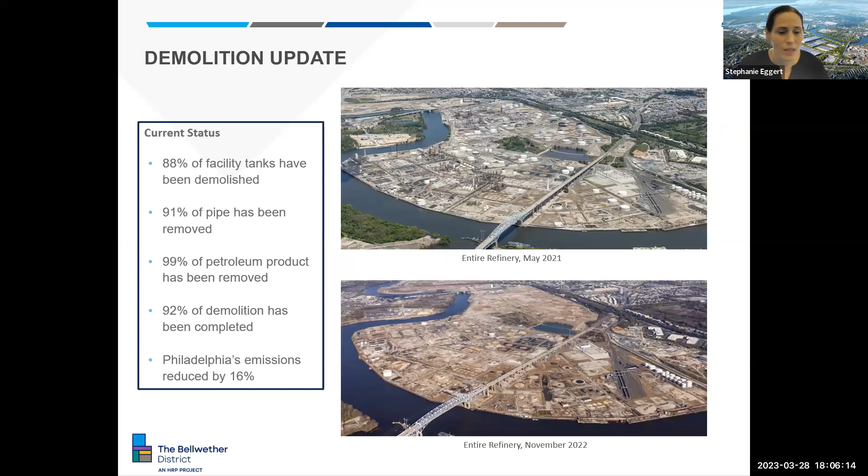And with that, you can go to the next slide and we'll turn it over to Julianna Connolly. Thanks, Steph. Hi, everyone. You can go to the next slide.

So we're busy over here on remediation activities. We like to start with this slide because there are two responsible parties at this property for cleanup work. And it's important to understand those distinctions as I talk through the work that we, PESRM or HRP, are working on. So the two responsible parties for the remediation cleanup work are ourselves, so PESRM or Hilco Redevelopment Partner. So we took over PESRM's obligations. And then the other responsible party is Evergreen or Sunoco, a party that ran the refinery prior to PESRM's operation of the refinery.

So what we, HRP, are focused on are cleanup of releases, so releases of chemicals to the soil and the groundwater that occurred after September 2012, and all of the Act 2 reporting associated with that contamination, Act 2 being the Pennsylvania site cleanup regulatory program. We're also responsible for sampling beneath all of the storage tanks that used to be present on site to evaluate whether releases occurred beneath those tanks.

We're responsible for management of soil during redevelopment of the property, and we're responsible for vapor intrusion assessments into new buildings. Vapor intrusion means making sure that volatile or vapor phase chemicals in the ground don't make it into the indoor air of new buildings constructed on site. Evergreen and Sunoco, who operated the refinery prior to PES, are responsible for contamination that was in place during their operation—contamination that occurred prior to September 2012.

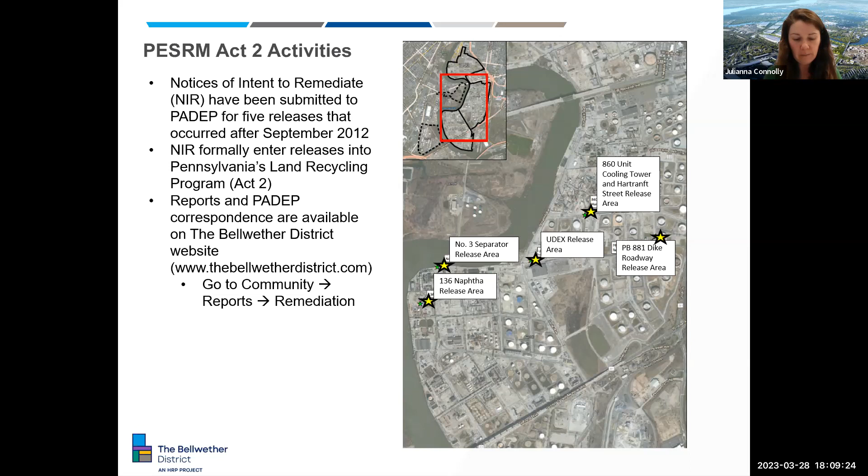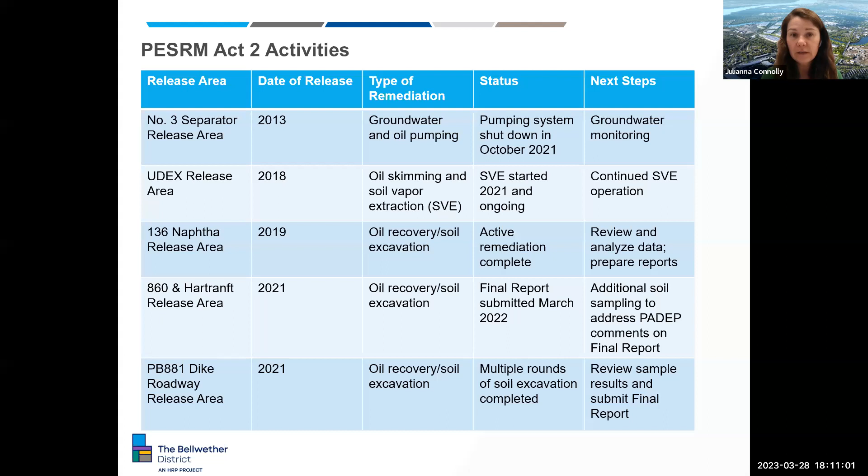The first 2 you'll see are some sort of pumping or recovery of oil from the subsurface. Those are the larger two of these 5 releases. And the UDEX release area is really the largest of the releases we're focused on. That's a remedy I'm going to talk about a little bit more on the next page.

Next slide, please. As I mentioned, this UDEX area is the largest of these 5 releases we're working on cleaning up. It covers about an 8-acre area on the site. The whole property is over 1,000 acres, and this area covers about 8 acres.

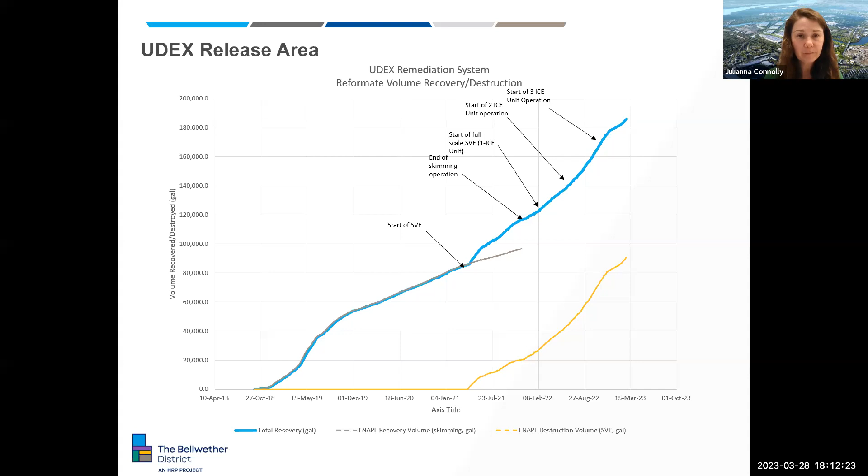As I mentioned, another thing we're very focused on is the AST, or above ground storage tank closure. For anyone familiar with the site, you would have been able to see from the street these huge tanks—they're called above ground storage tanks because they're above ground, as opposed to underground storage tanks that would be more typical at a gas station. They held oil or processed oil and different types of oil used or processed in the refining process.

As part of the regulatory closure of these tanks, we need to sample the soil and groundwater underneath to see if there were releases from those tanks that occurred that maybe no one was aware of, because the tank covered such a big footprint you couldn't really analyze underneath it.

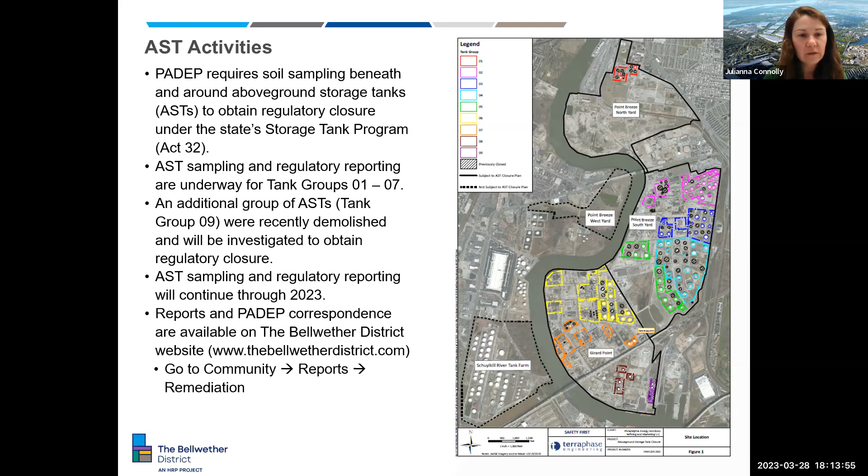The third area of focus for our remediation team is what we refer to as the soil management plan. The redevelopment of this property is going to require a lot of movement of soil around the property to achieve the grades necessary for construction. By grades I mean the ground surface level—some areas need to come up higher, and in other areas it'll be brought down lower.

At a site like this, with the history of being used for oil refining for so long, there's the potential for the soil to be contaminated. Prior to our acquiring the property, we came to an agreement with the Pennsylvania Department of Environmental Protection in a document called the Soil Management Plan, where we agreed to sample all of the soil we were going to move prior to moving it.

The reason we wanted to do that is for a couple of reasons. One, to make sure we knew what was in the soil before we moved it, so we could handle it appropriately during its movement. Two, to make sure that if soil is moved, it ends up in a new location that's safe for the new use—making sure the more highly contaminated soils aren't put where people would be more likely to come into contact with them.

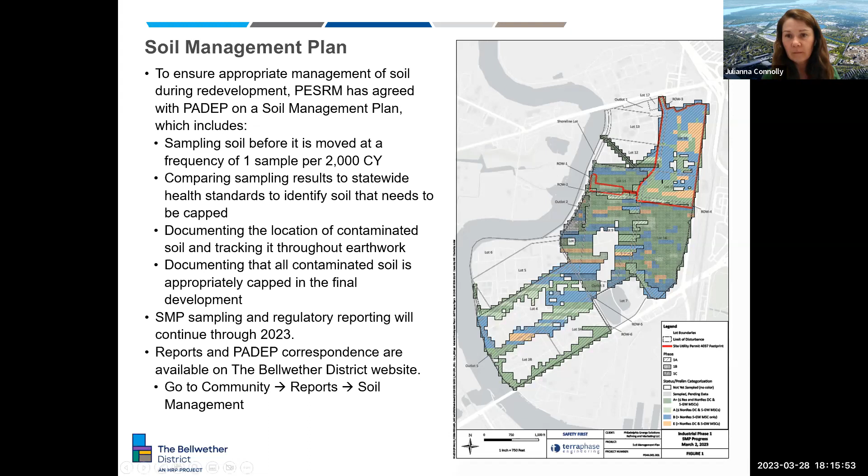Great, and I'm going to hand it over to George to talk through the framework plan.

Thanks, Julianna. Good evening, everyone. I'm going to quickly spend a few minutes walking you through an overview of the conceptual master plan framework that we've developed for the site.

As you can imagine, one of the challenges associated with developing a site of this scale is that it's very difficult, if not impossible, to plan exactly how the site is going to look once it's fully built out. Naturally over time, markets change and evolve, which will require us to respond accordingly. So when we consider planning for a site of this scale, we typically develop what we consider a master plan framework that lays out a street network, identifies key connection points into the existing road network and surrounding neighborhoods, while enabling some flexibility going forward.

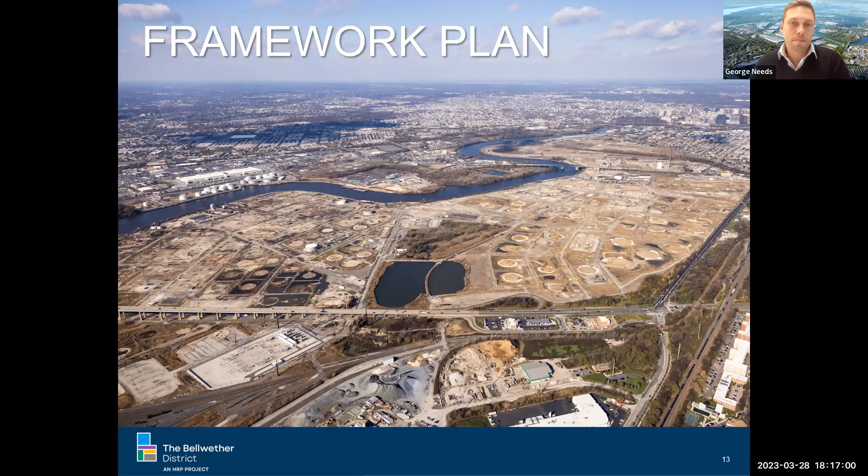This slide identifies the site within the greater context of the city. You're probably familiar with this, but the site area totals about 1,300 acres. While it is a large land area, given its prior use, it remains cut off from the rest of the city. It's bounded by a natural barrier in the form of the Schuylkill River to the west, and the I-76 highway to the east. One of the topics I'm going to get into is how we intend to create access to the site and develop those important connections back into the urban fabric.

In total, we plan to deliver around 13 to 15 million square feet over the course of a multi-phased, multi-year project, which is projected to generate up to 19,000 jobs. Those jobs will range across a range of salaries and qualification needs as we focus on two key industries.

The first being a state-of-the-art industrial and logistics area that you can see highlighted in yellow, located on the south side of the site. And the second being a life science campus shown in red, that will sit on the north side of the site.

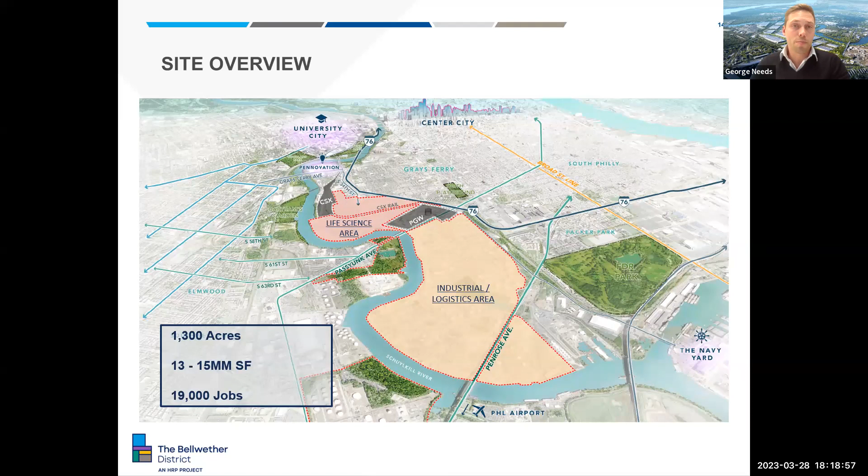That will house important research and development and manufacturing activities associated with the life sciences industry. It's important to note that, from an environmental standpoint, the redevelopment of this site is going to have huge benefits to the local communities that go beyond job creation, as the decommissioning and removal of the refinery has reduced emissions within the city of Philadelphia by a huge 16%, which is substantial.

This next slide illustrates some more details associated with each of these areas. The industrial and logistics area totals approximately 10.5 million square feet, planned to be redeveloped over approximately 750 acres on the southern side of the site—everything south of Passyunk Avenue. Here we're planning for important industrial and logistics users that will support the inner workings of the city and will deliver approximately 10,500 jobs.

On the north side of the site, everything north of Passyunk Avenue, we're planning for a life sciences campus totaling approximately 3 to 4 million square feet across two distinct parcels, delineated by an active CSX railroad. Based on this, we're projecting approximately 8,500 direct jobs at full build out, covering the full spectrum of qualifications from lab technicians to facility managers, biochemists, and marketing and administrative professionals. These jobs really require a range of qualifications from high school diplomas to a PhD.

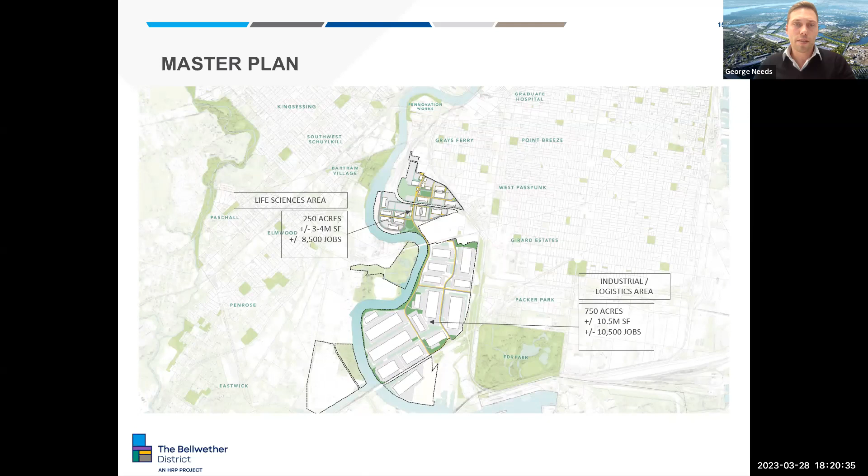In developing the framework, we really drew from a number of planning studies that had been completed to help inform important pedestrian, bicycle and open space connections that could be created. We looked to existing frameworks developed under the Lower South and Southwest plans, as well as the Lower Schuylkill master plan.

From that, we identified 3 key project goals as we developed this framework. The first being to reintegrate the site. Given its prior use, being the home of the largest oil refinery on the East Coast for the last century, the city has effectively been built and grown around it. So the first challenge is how we integrate it back into the city fabric, and in particular how we create new access points that will enable new connections into the public street, bicycle, and pedestrian networks.

The second point of focus is creating green pathways, and this considers how we can create a public realm and a street network that is safe, multimodal, and uses landscaping to connect open spaces while providing an enjoyable pedestrian experience, as well as thinking about other benefits like helping to manage stormwater runoff.

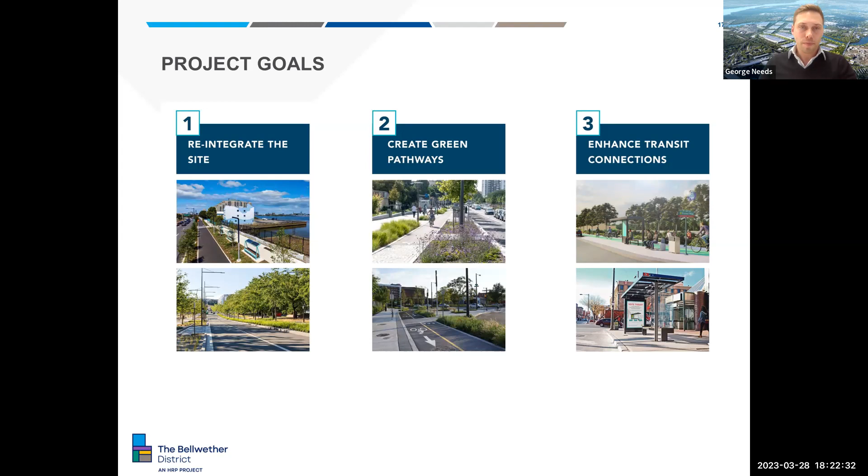This next slide identifies new public streets that have been proposed on the site, focusing on eight key access points where the site ties into the existing street network. On the logistics campus, south of Passyunk Avenue, the plan has 2 key north-south connections: Schuylkill Avenue and Francis Harper Drive, which connect Passyunk Avenue to Penrose Avenue, with an east-west connection in the form of Hartranft Street connecting out to 26th Street.

On the Life Sciences campus to the north, we have 3 primary access points that extend 34th Street into the site and provide additional connections out to Maiden Lane and Vare Avenue through Thornton Way and Jackson Street.

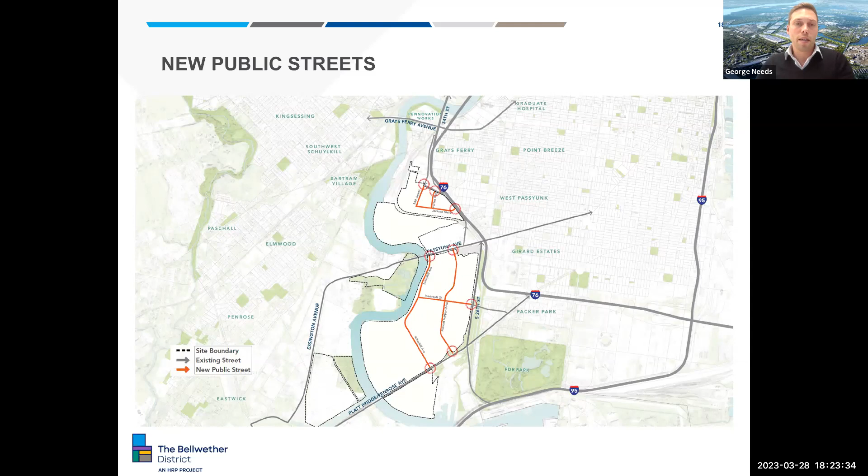This next slide looks at how we're proposing to tie into the existing bicycle network through a series of dedicated and shared bike lanes that will help facilitate a north-south bike connection, linking to existing bike paths at Grays Ferry Avenue to the north, and all the way down to Penrose Avenue to the south, enabling a safe and enjoyable cyclist experience through the site.

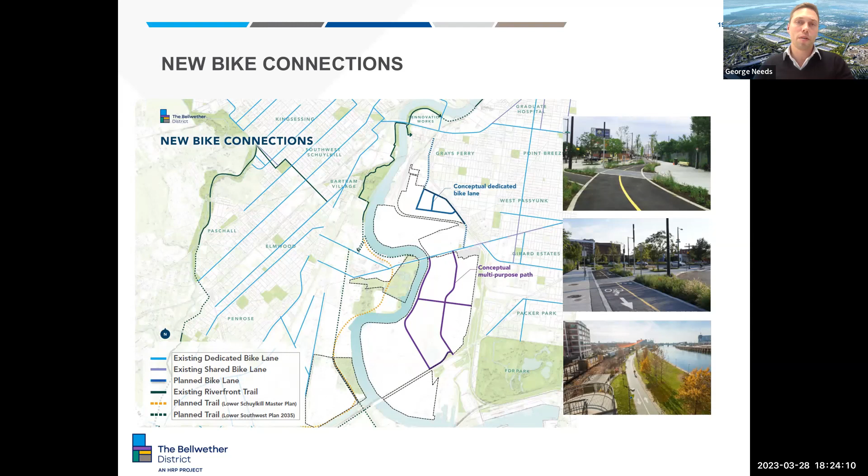This next slide illustrates the idea of creating a single green connection, a green spine that runs all the way through the site. Where possible, this could take advantage of riverfront access by adding thousands of plantings and trees, so that once complete, we'll provide a sustainable landscaped pedestrian and bike trail that facilitates an important north-south green connection from Pennovation to the north, down to FDR Park to the south.

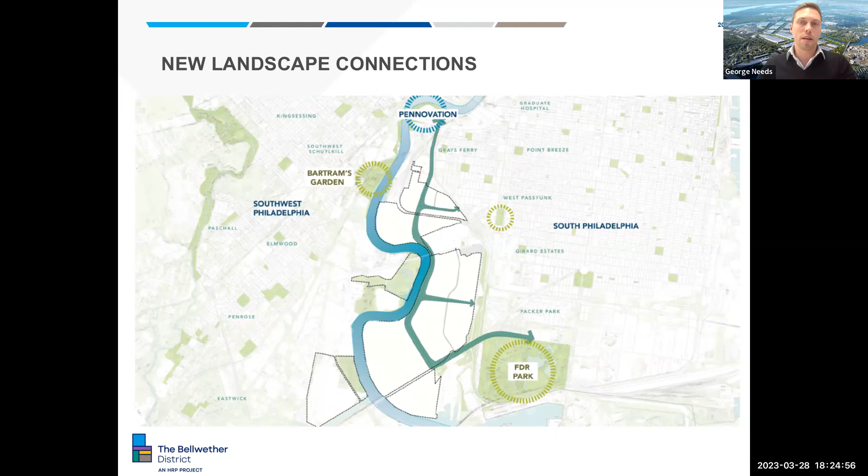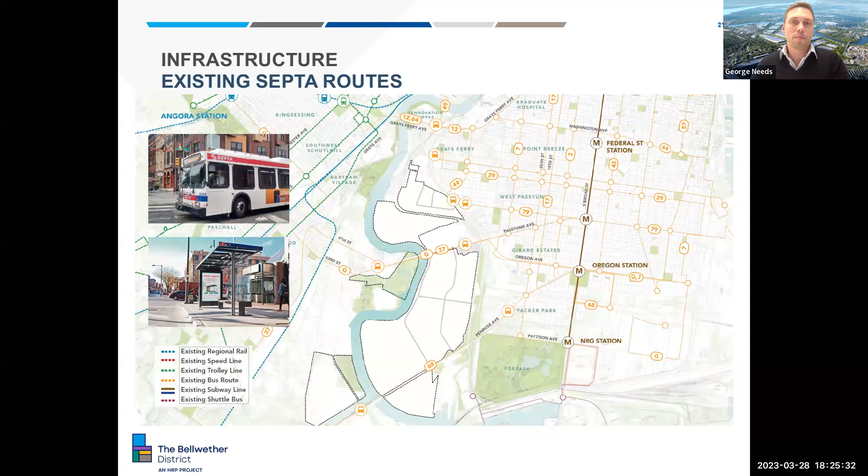Next slide please. And just quickly before handing it over to Amanda, I wanted to share some additional details associated with the phase one schedule for both the industrial and life sciences areas.

We've recently commenced enabling work to begin earthwork on the industrial side of the site for phase one, with vertical construction anticipated to commence in Q3 of this year.

Phase one of the life sciences is trailing by roughly 9 months. We have the goal of starting earthwork in Q4 of this year, which would put us in a position to commence vertical construction in Q2 of next year.

As we've been doing throughout this process, we're going to continue our community engagement efforts, and we'll be hosting quarterly meetings to share important project updates and details.

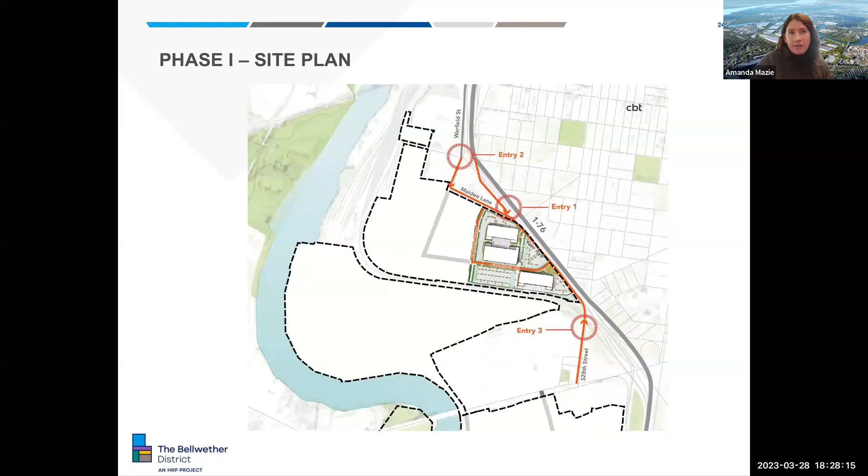Zooming in further, we are planning approximately 500,000 square feet in 3 buildings with surface parking. These buildings are designed to attract GMP, or good manufacturing practice, users, which will accommodate the manufacturing and storage of pharmaceutical and therapeutics or other processes that need to be conducted within a controlled environment.

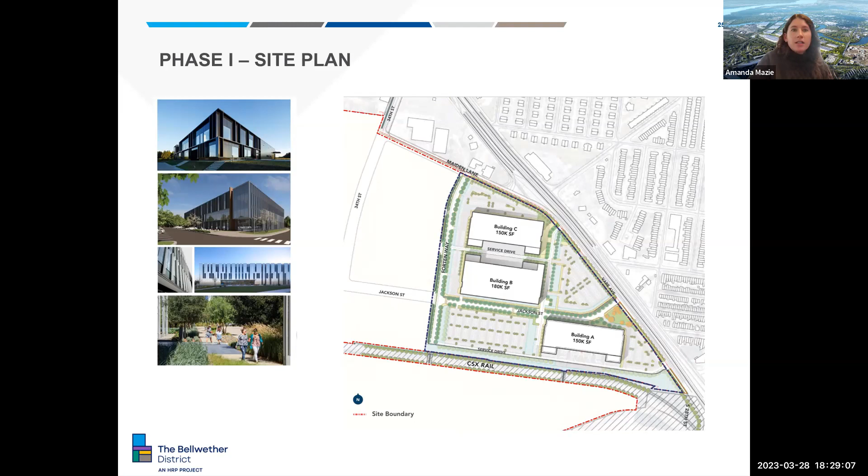The main roads in our first phase are Fortin Way and Jackson Street, with loading and service drives hidden from the main streets behind the buildings, but still very accessible. We are planning dedicated bike lanes and separate sidewalks with landscape buffers in between, and we will have on-street parking and lots of street trees.

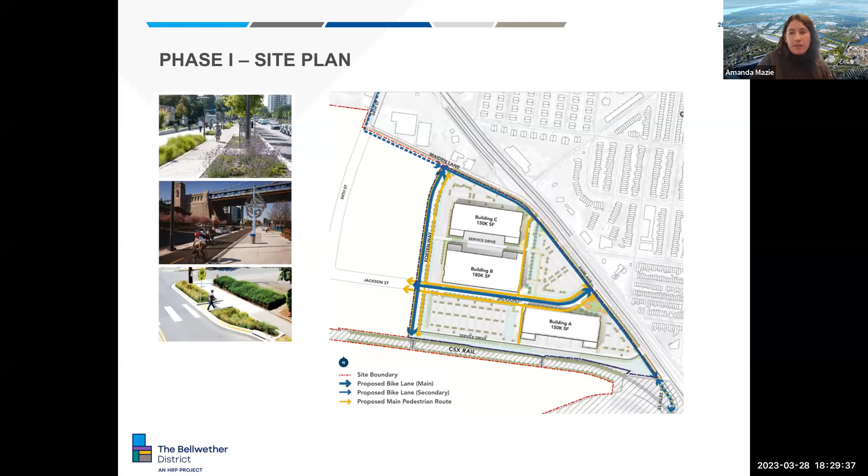This slide also shows a few images of Columbus Boulevard, which serves as the inspiration for our campus's design and feel. Next slide, and then I'll be handing it over to Justin.

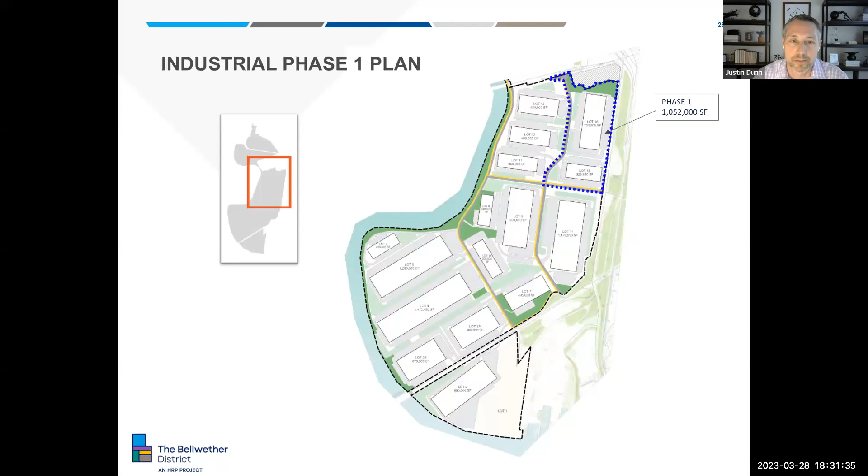Next slide, please. As we zoom in here, this is lot 15, the 326,000 square foot building. We are placing that at the corner of Hartranft, a new Hartranft extended, and Frances Harper Drive, another new road, and also 26th Street to the east. This is a 40-foot clear building, Class A industrial. You'll see what a Class A industrial really looks like on the next slide, Matt.

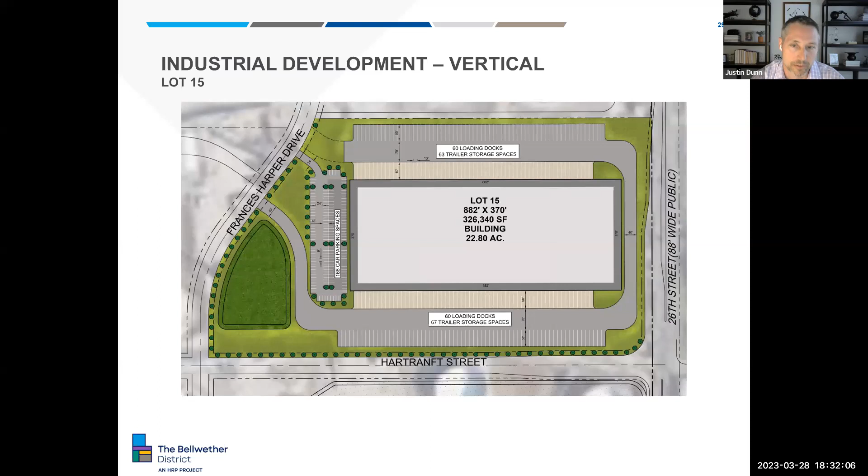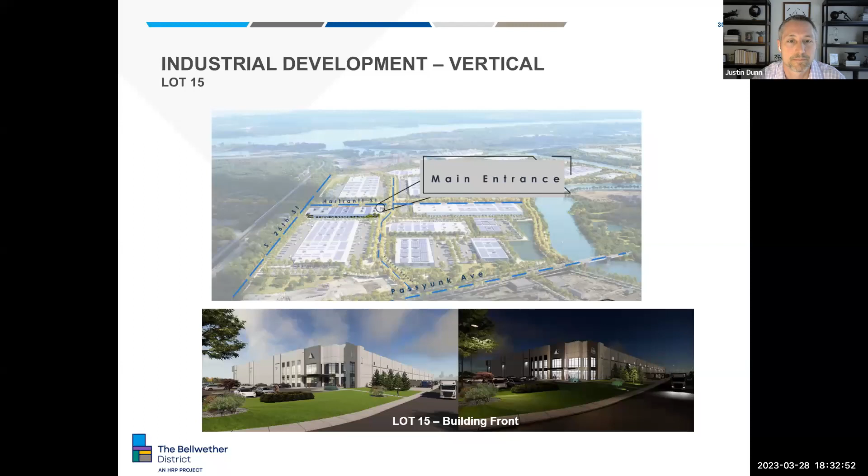This is lot 15, a 700,000 square footer, also 40-foot clear. We have an 8-inch reinforced floor slab proposed for these so they can handle heavy loads. This will accommodate a large spectrum of potential tenants, whether manufacturing or logistical, equipment for MHE.

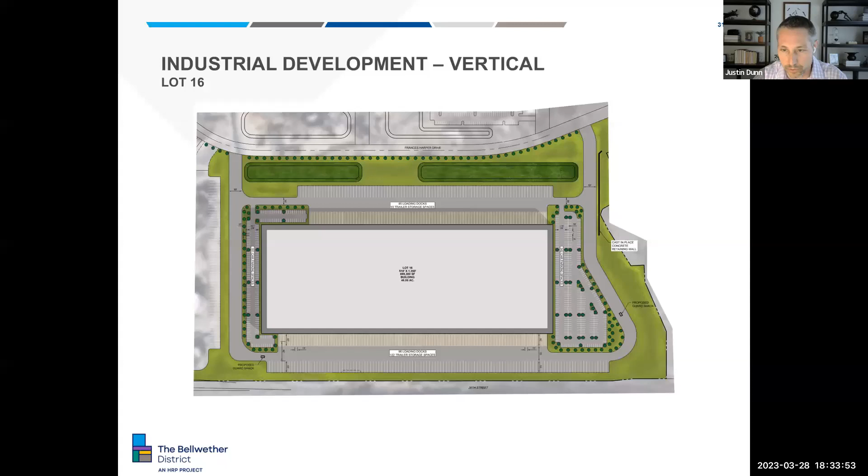One thing you'll notice on these site plans - we're very carefully designing these to accommodate stormwater ponds, as you see to the north, the darker green, and also adequate truck parking, which serves as overflow storage of trucks. The point is we want to contain any truck parking and overflow parking within this park and within each individual site. That's an important aspect of our designs that we consider. Next slide.

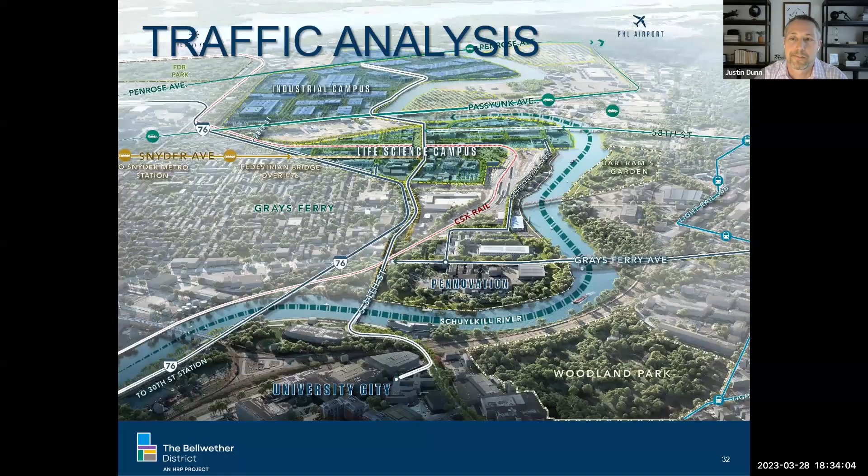We'll start talking about the traffic analysis. Next slide. As part of our project, really at the start of purchasing this property back in 2020, we commenced the traffic impact study. What's extremely important is for our site to actually function and work, it has to work from a traffic perspective, and that works both ways. The community wants this to work, the region wants this to work from a traffic perspective, and we also need it to work. So as we kicked off that traffic study, we worked very closely with PennDOT and City of Philadelphia Streets.

One of the major challenges we've faced is really opening up this site that was closed off for nearly a century. That comes with challenges of how do we get traffic fluid in and out, how do we improve the surrounding area to make sure this works for not only our park but for the community. As we've gone through that study, which has taken about 2 years now, we've really honed in on what the offsite improvements will look like.

One of those is a new signal at the intersection of 26th and Hartranft Street, and also new decel and accel lanes along there, including an additional right turn lane all the way from the intersection of Hartranft down to Penrose, so it'll be a double right turn coming from Penrose. And selfishly, I drive that route every day, and I'm usually the one stuck in line while people cut me off to turn right, so I'm looking forward to those improvements on a personal note.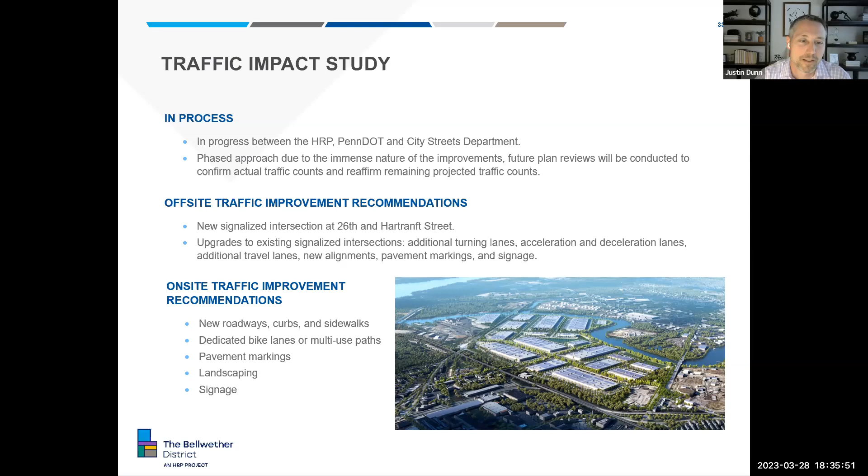Next slide. So this hones in on that intersection and the start of those improvements. You'll notice a new decel lane coming into our site, an accel lane exiting our site, and then a new lane along 26th Street heading south.

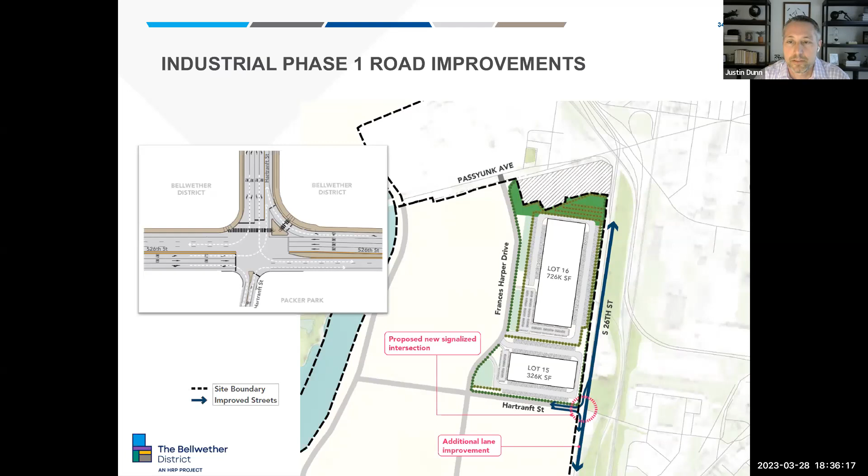On the life science front, the new roads—Amanda already covered a lot of this—again, extending the bike lane paths and some restriping from 34th Street. We're also adding a stop sign for safety control. We have Maiden Lane with bike lane and pedestrian pathways, and major improvements along Vare Avenue and 28th Street, really trying to open this portion of the site back up to the public to service these buildings.

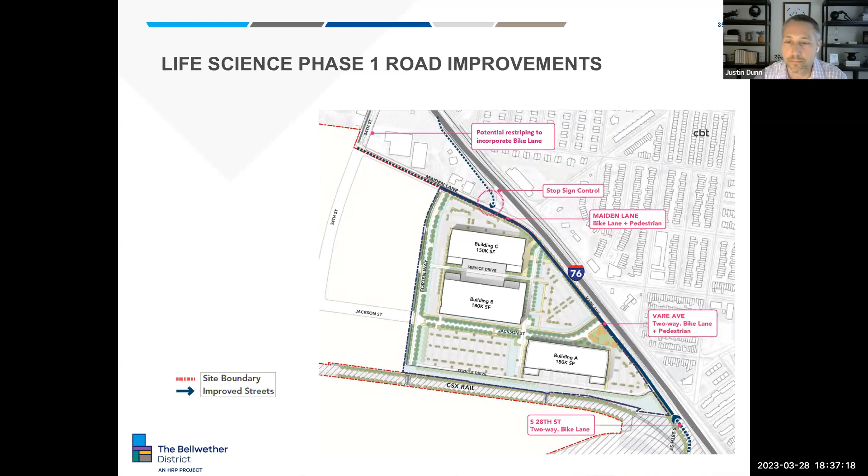And that's just the start—an initial phase of these road improvements. You can see on this plan Fortin Way, an extension into 34th Street as we continue, and Jackson Street. So there's much more to come as we continue the development. But this just focuses on phase one, which we hope to start on the life science end about middle of next year.

Another important aspect for us to consider was truck parking. We've heard from many community members, even on other projects, the main concern of trucks parking and idling in residential neighborhoods throughout the city. So we wanted to address that head on, especially as it relates to our park. Again, this is a very large park, and we are very conscious of creating adequate parking for trucks within the site itself. We've also looked at how to discourage trucks from actually entering neighborhoods in the surrounding area.

The main one at this point being on the east side of Hartranft. Where it's highlighted here, we're maintaining right in, right out movement. So while that new intersection at 26th and Hartranft will be constructed, we've kept what's called—people will laugh at me—the pork chop, which allows a right in, right out only at Hartranft as you go east. That discourages any movement, including trucks, from going straight from our site into Hartranft Street.

So again, this would not technically be a full movement signal intersection. It will allow left turns from 26th Street into our site, right turns from 26th into our site, left or right out, but not straight through. So we're maintaining that right in, right out on the eastern part of Hartranft.

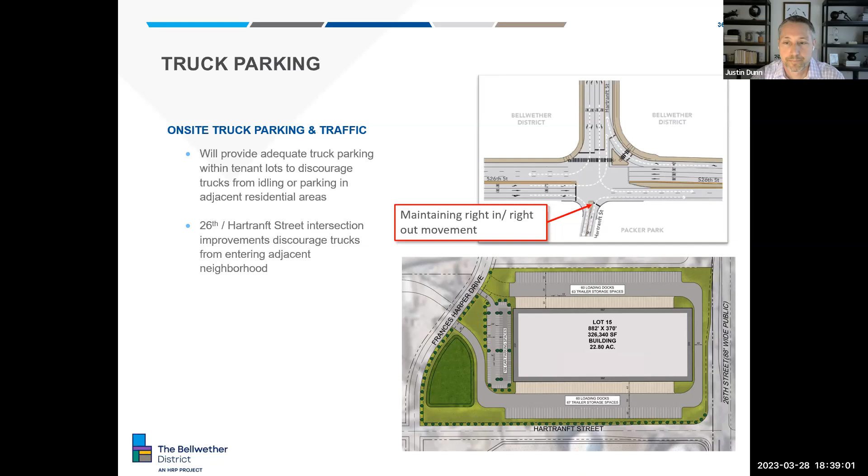Sustainability is an important core value of our development, design, and construction. We hire the best professionals to help provide innovative ideas for consideration. For example, we're currently underway with an energy master plan that looks at including sustainable technologies such as solar, which we feel strongly will be an integral part of our energy plan.

Along with that, we're looking at future-proofing this as much as possible. For example, electric vehicle charging stations being planned. We're looking at extensive landscaping above code requirements. These are just very important initiatives for us.

As Juliana alluded to earlier on the soil management plan, an important aspect for us is to be able to regrade our site, as we have some higher areas and some lower areas. About 40% of our site was within the 100-year floodplain, which was known for flooding—you could almost see it if you're driving over the bridge today, with a lot of low-lying areas that contain water. So we are regrading that site to raise those elevations out of the 100-year, and even the 500-year in most cases, for any building finished floor slabs.

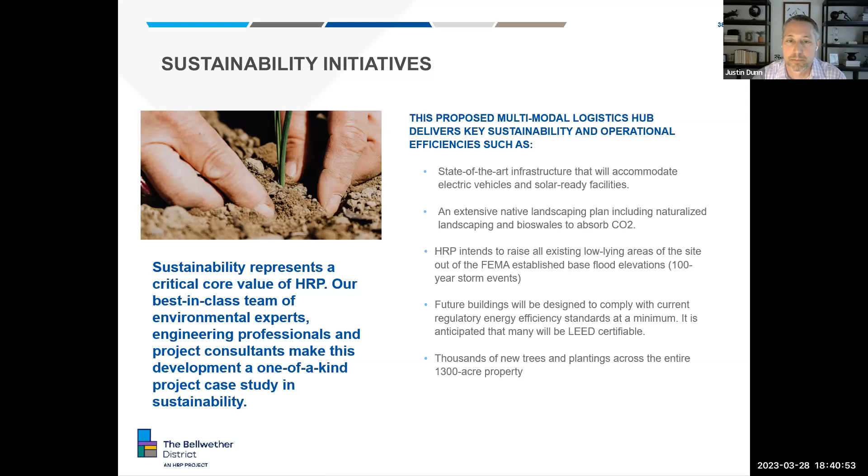And then last but not least for us on the building side, we do intend to incorporate LEED initiatives so that we can try to get LEED certified buildings out here as much as possible.

Another item we wanted to cover was flooding. We began analyzing the site for flooding in 2020, pretty much immediately after acquiring the property, as it was known for flooding—we'd seen with our own eyes some of those issues. There's also just drainage issues in general on our site.

As a result, we've worked with FEMA and the City of Philadelphia to prepare a comprehensive floodplain study that was very massive. It included 17 bridge structures, modeled 17.5 square miles, and included a drainage area of 1,900 square miles—equivalent to nearly 920,000 football fields.

It's an incredible stat. So after 2 years of close collaboration with FEMA and the City of Philadelphia, we received approval to regrade our site, allowing long-term resiliency with proposed buildings and parking lots well above the 100-year floodplain. Having our finished floors outside of the 500-year continues that resiliency. The process included multiple iterations and studies closely collaborated on with the City of Philadelphia and FEMA, and the City accepted the mapping revision in November of 2022.

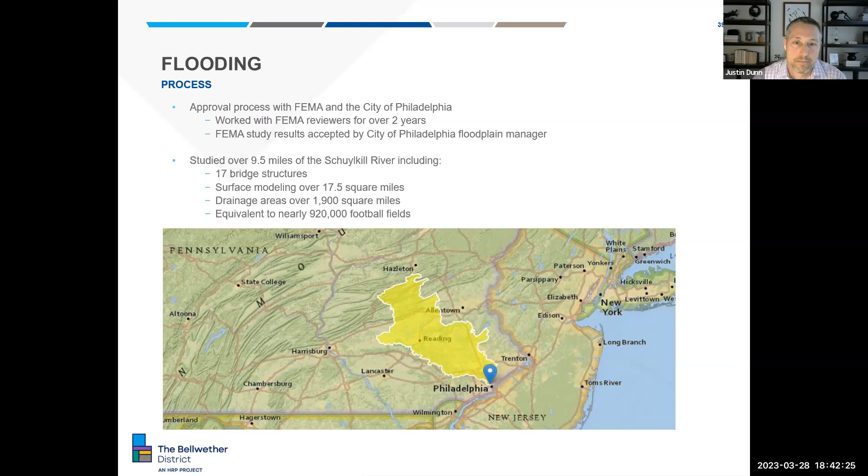Next, there you go. Oh, there we go.

So all existing, interim, and future stormwater runoff will continue to be monitored by the Philadelphia Department of Environmental Protection. We are proposing new drainage infrastructure to be designed and planned for the entire development that will significantly improve drainage for the site. This doesn't just include inlets and storm drains for conveyance, but also several large ponds for retention that manage stormwater runoff, both quality and quantity.

It treats for quality purposes under state regulations for stormwater quality control. It also treats for quantity management, releasing stormwater at a specific designed 10-year management rate before it enters the Schuylkill River. So everything enters our ponds and is controlled from a quantity management perspective before it enters the Schuylkill River.